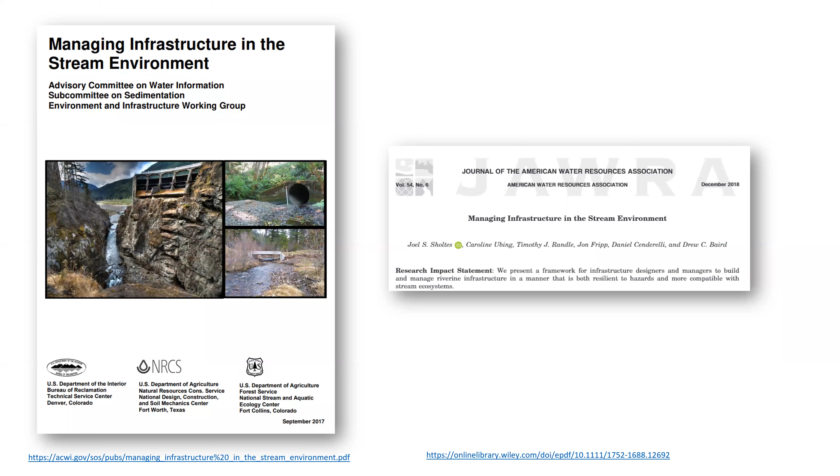So this report was also then published as a companion paper in the JAWRA Journal, which is shown on the right. We were fortunate enough to work with a really great team on these publications. And so you can see here we have a list of 6 different authors from 4 different entities. Furthermore, we have an extensive peer review list that comes from several different entities ranging from state governments, consulting firms, federal governments, and university. So a lot of experience and expertise was brought into this document.

And this all stems from the U.S. Secretary of the Interior's Advisory Committee on Water Information, who is the publisher of the document, and from the Subcommittee on Sedimentation. So we had an individual work group on environment and the infrastructure.

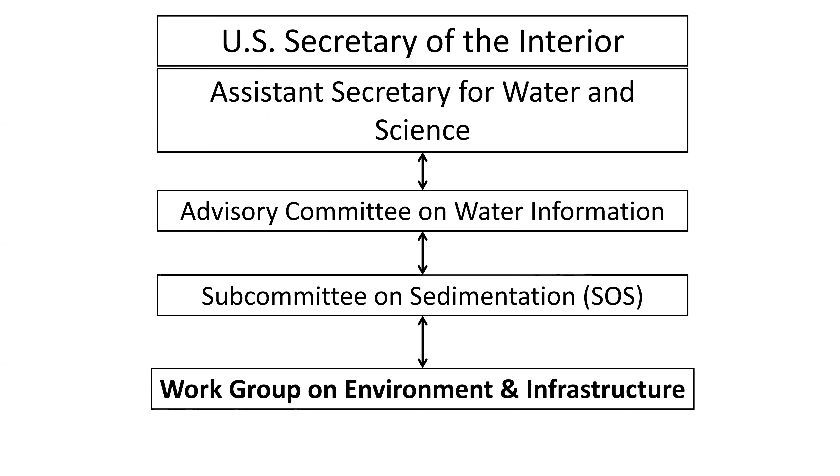So the purpose of these papers is to introduce managers and planners to best practices associated with building, maintaining, and repairing infrastructure. So as new infrastructure is built and old infrastructure is replaced or repaired, we have this excellent opportunity to increase both the infrastructure resiliency and also to decrease the impact to the riparian ecosystems. And so we intend to educate managers going through 5 different steps.

So first we want to introduce them to large-scale fundamental principles of river processes and ecosystem functioning. We then want to provide them with a decision tool or a framework on how to replace, repair, and build new infrastructure in a way that takes the stream environment into consideration. We then apply that framework to examine challenges and solutions associated with 11 different infrastructure types. Now these 11 types are discussed more thoroughly in the paper, but we will only touch upon them for the purpose of this presentation.

We want to discuss how we can best manage riverine infrastructure under uncertainty, both hydrologic uncertainty and condition uncertainty, and then discuss disaster recovery and response. So we spend a lot and invest a lot in repairing and building new infrastructure. So we want to ensure that these expenditures are made wisely and in a way that is best for both the infrastructure and our ecological system.

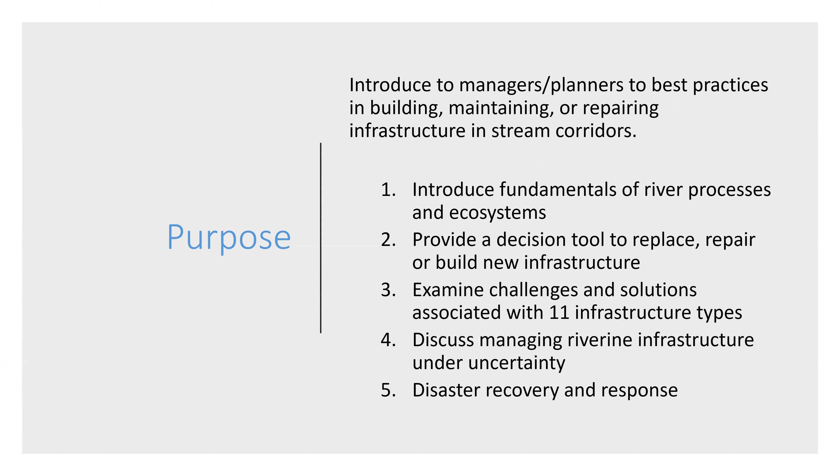So let's get started. We'll first discuss the fundamentals of river processes and ecosystems. As many of you are very familiar with this, we will go through this rather quickly. So first I want to introduce to managers the idea of a stream corridor. The stream is more than just the wetted channel. It is made up of several components, including the channel, the floodplain, riparian zone, and the uplands.

And we want to introduce managers to the concept that these systems all interact on both a temporal scale and a spatial scale, and they interact both longitudinally along the river moving downstream and laterally across the river width.

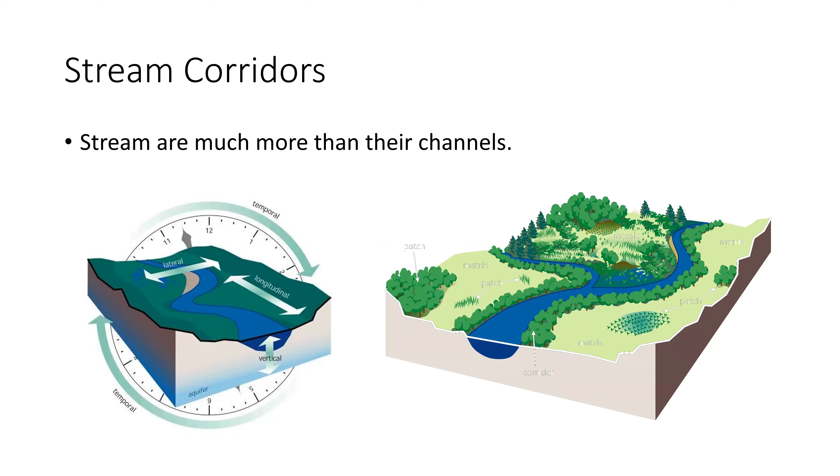To do this, we introduce the concept of dynamic equilibrium and channel response. So we really want to stress to our management community that streams are not static features. The banks will move and it will degrade and aggrade. And so we want to stress that these active systems are capable of transporting, storing, and remobilizing sediment, wood, and

nutrients. So for example, if vegetation is stripped from riverbanks, it is likely that that river is going to widen. The converse is true. It'll deepen where vegetation is very dense. We also expect to see meander bends migrating downstream and across the valley bottom.

So while we recognize that these streams over long periods of time will be relatively stationary in terms that they have average widths and average meander bend lengths, on the short time scale, which is typical of most infrastructure projects, we should expect to see some movement.

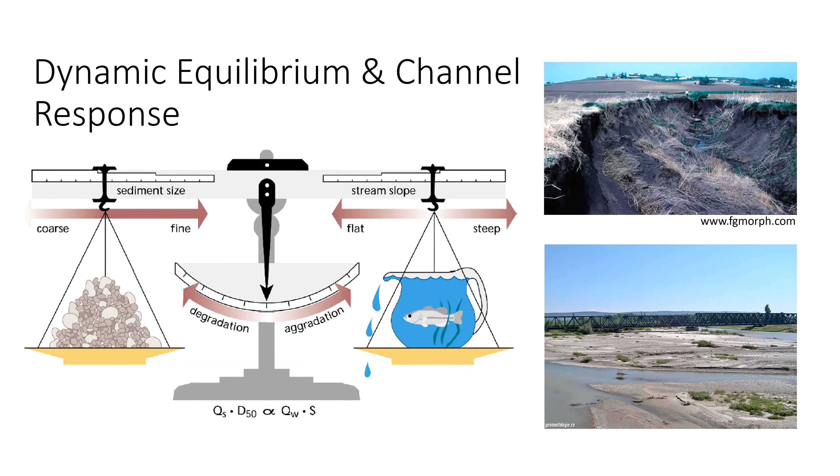So we really want to stress this concept by introducing managers to Lane's balance, which I'm sure you are all very familiar with, focusing on the fact that stream form in alluvial channels results from the interaction of channel shaping factors, such as flow and channel slope, with resisting factors, such as bed material size and incoming sediment load. So if we see a large change in any of those four factors, we're likely to see a response from the channel in either aggradation or degradation.

We want to give managers a little bit more of an idea of how these streams will change using the channel evolution model. And so this model describes how streams will attempt to reach an equilibrium as a response to a disturbance. We also want managers to be aware of what those disturbances could be. So this includes changes to magnitude and frequency of floods due to urbanization. It can also include physical changes to the channel, such as channelization and confinement by floodplain encroachment.

We also want the scientific community and managers to be aware that there is now an updated version of this channel evolution model with a stage 0, depicting an anastomosing wet woodland or grassed wetland that was introduced by Brian Cluer and Colin Thorne and published in 2014.

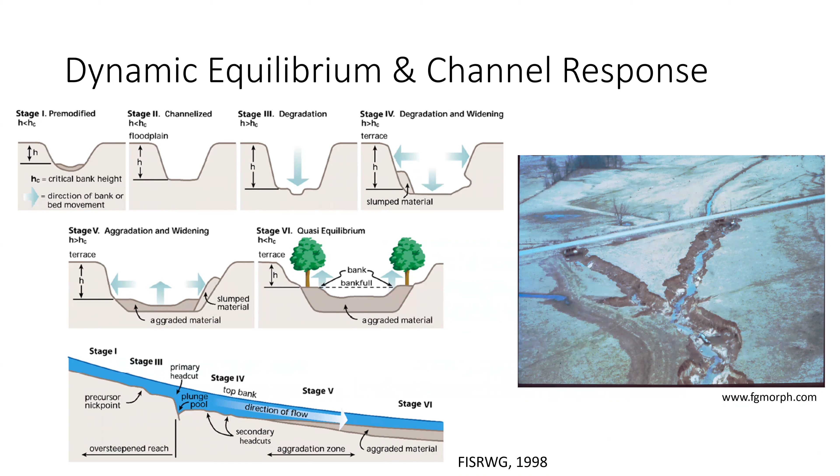So with that, we then introduce the idea of a channel planform to managers. We want them to understand how different channel planforms are likely to move and behave in different ways. So if they have a good understanding of the fact that a braided anastomosing system is going to be very dynamic and it's going to move a lot, they might know that this is not a great place to put a bridge. You're more likely to have success and to have a stable channel in a straight singular channel.

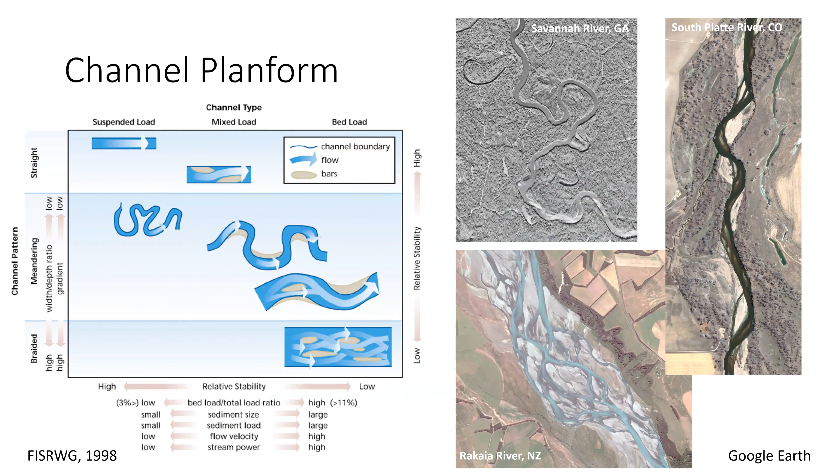Great. And, you know, a lot of the paradigm that we've been taught over the years is that channels are typically single threaded and that they have this orderly transition from headwaters to main stem to maybe coastal regions. And this has informed over the last decades, maybe in the 20th century, our concept of what a reference condition is for a stream. However, in the last decade or so, there's been a lot more discussion.

Caroline mentions the Cluer and Thorne paper, where we're trying to update our concept of channel evolution to account for the fact that channels might have been much different, and we have a lot of evidence that they were different in many situations than we think of them today, and then as we see them today.

Pre-settlement, pre-European settlement, rivers were much more messy. They had more large wood in them, more riparian vegetation. Beaver dominated North America in almost all river courses and had a really intense presence in terms of creating situations for wetlands or multi-threaded wetland type of conditions.

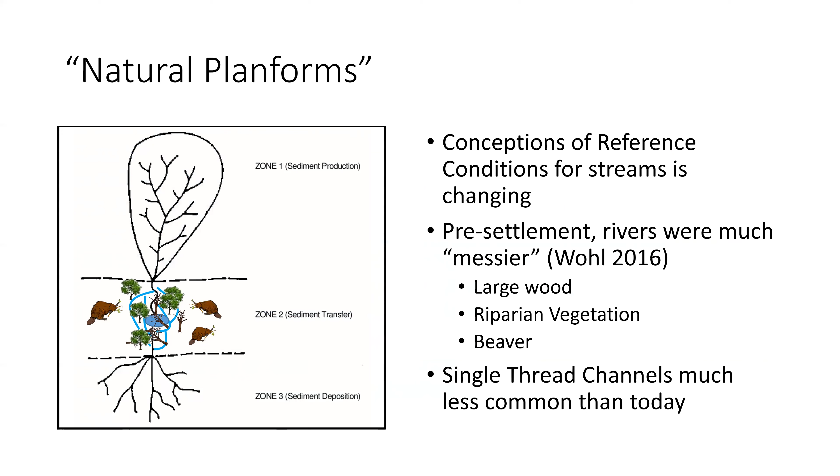Another part, a really important part of understanding river processes is understanding what the natural flow regime is for a particular river. Natural flow regimes, or any flow regime that supports a functioning river ecosystem, has many components, including the magnitude, frequency, and duration of floods, of high discharges and low discharges, the timing of those flood peaks.

In the Rocky Mountains, we have a very strong snowmelt signal, and that's very common in big mountain systems. In other areas, floods might be scattered throughout the year as a result of precipitation, as well as the rate of change of floods, how quickly they rise and fall. All of those can be influenced by flow regulation, by urbanization, changes in hydrology to the system, wildfire, for example.

Some of these might be long-term changes or transient changes. And so understanding the context of the flow regime and how that influences the physical environment and biological environment is important. On the right side of the screen, there's an example of altered hydrographs. So discharge on the y-axis and days or months of the year on the x-axis.

And it shows that for the Green River, we have a fully regulated system, which would be the red line compared to the blue line, pre-dam and post-dam. On the Yampa, it's largely unregulated. And then downstream of the confluence of the Yampa and Upper Green, we have a kind of a mixed flow regime that's impacted by the regulation on the Upper Green River, but supplemented by flows from the Yampa.

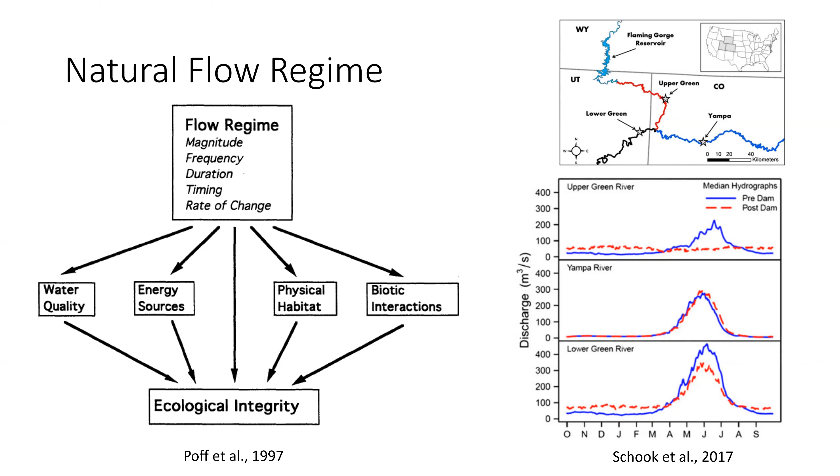Another part of understanding river processes is understanding the hazards that they pose to infrastructure and to development within the river corridor. This is just an example of a stream crossing that, while it's an open culvert, which is great, we might have a natural bottom there. The channel decided to go around this stream crossing and erode the road and take it out.

So perhaps this was sited in an area where flow was constricted in an unnatural way and resulted in the ability for the river to move around this structure as a result of a flood. So characterizing hazards as part of understanding the processes in rivers is going to be important to understand how to manage them and construct them.

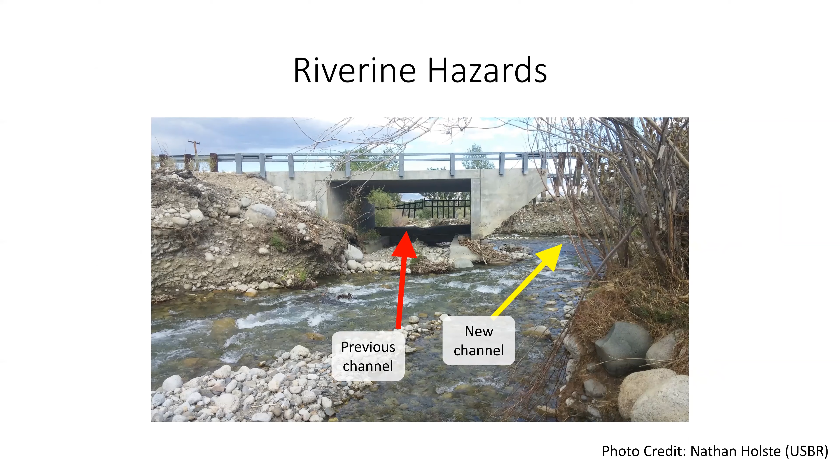So we have existing tools which typically focus on inundation hazards. So this might be the 100-year, 1% annual exceedance flood map, floodplain map that is part of the National Flood Insurance Program and FEMA. That is one example of flood hazards. Another is fluvial geomorphic hazards. And these could be delineated by understanding geomorphic processes. They typically aren't mapped as a rule of thumb.

However, certain states have taken on the initiative to create methods for mapping what we might call the fluvial hazard zone. And this would be a zone where the river could move as a response to the flood. And we have an example of this on the St. Vrain River in Colorado, where the river took a new course across the valley and an avulsion occurred. And the river moved outside of the previously mapped inundation floodplain from FEMA.

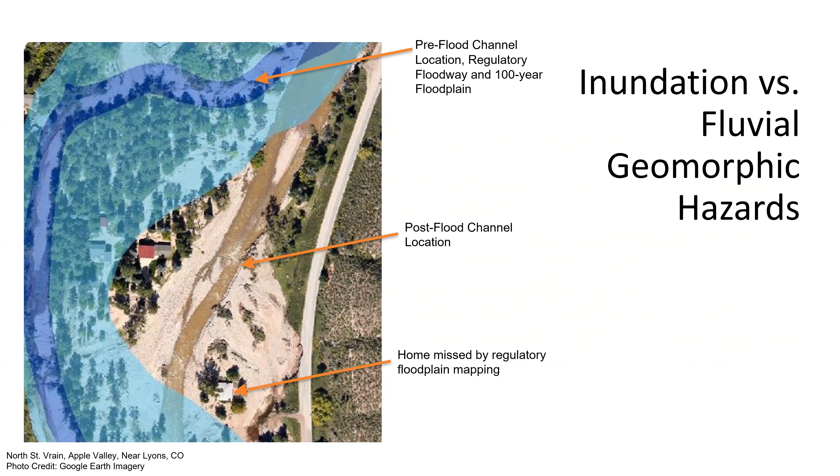And so this was a hazard that hadn't been mapped or considered based on existing floodplain maps. And so considering the fluvial hazard zone is important, as well as the inundation hazard zone, to characterize fully the hazards within a river corridor.

And this is what that might look like, where we have in green the active river corridor delineated as the geomorphic floodplain that the river might occupy during a flood or gradually over time as meanders move across the floodplain. And then appended to that would be an erosion hazard buffer, where erosion could occur into upland areas such as terraces or hill slopes that might be high above an inundation floodplain. Nevertheless, they might be susceptible to fluvial hazards in response to a flood.

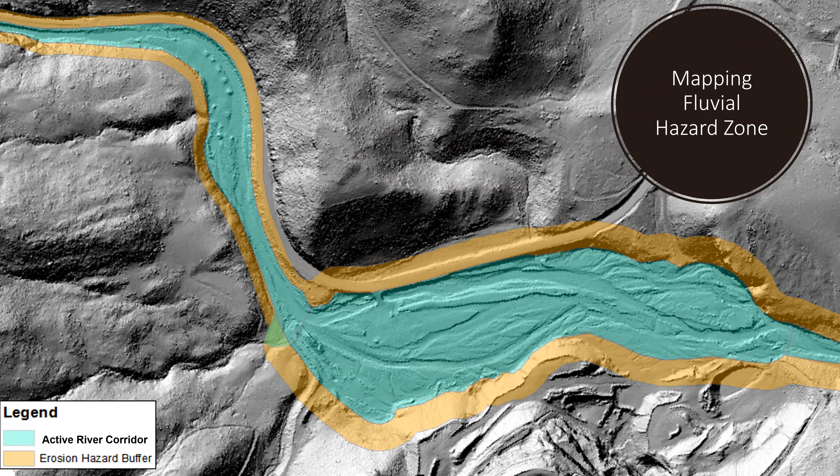So now that we've discussed the hazards to the infrastructure with our readers, we then want to introduce concepts associated with riverine ecosystems. How do they function? What makes them healthy? What is a degraded system? So we do this by discussing habitat heterogeneity and how it's coupled with biodiversity.

So we want to stress to our readers that having all of these little pockets of habitat that are all interconnected and slightly different can add to the biodiversity and encourage different species and a variety of different organisms to be living in the area, which contributes to the health of that system.

So we also want to stress physical complexity, that idea that Ellen Wohl has introduced of messy streams. We've had in our head for such a long time as a society that a healthy river is a clean, single channel without debris in the channel. Well, current research is showing that this isn't necessarily the case. We want to see wood in the channel. We want to see big boulders. We want to see vegetation hanging into the channel.

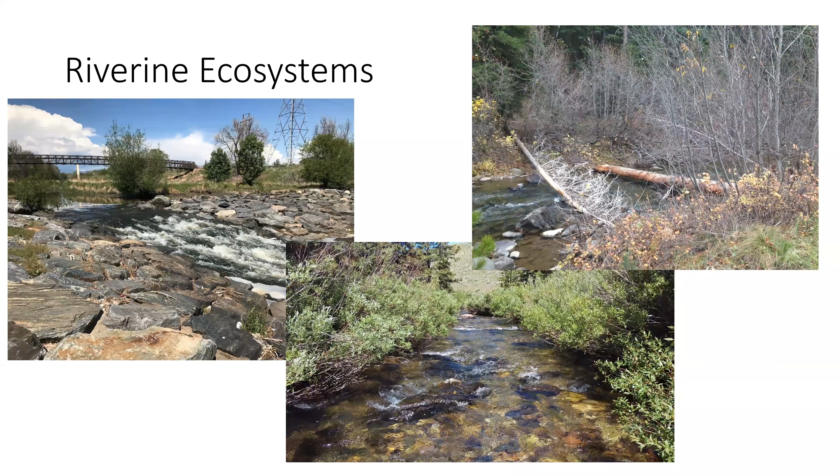And so introducing and stressing those concepts of lateral and longitudinal connectivity and continuity of water, sediment, and nutrients. All of the nutrients in the floodplain then come into the river to feed the macroinvertebrates, to then feed the fish. Also, the continuity of sediment and nutrients downstream. The sediment is held in the reservoir. It's not going to move downstream. We're going to see scour downstream of that reservoir, which will then move all of those particles that are beneficial to fish species.

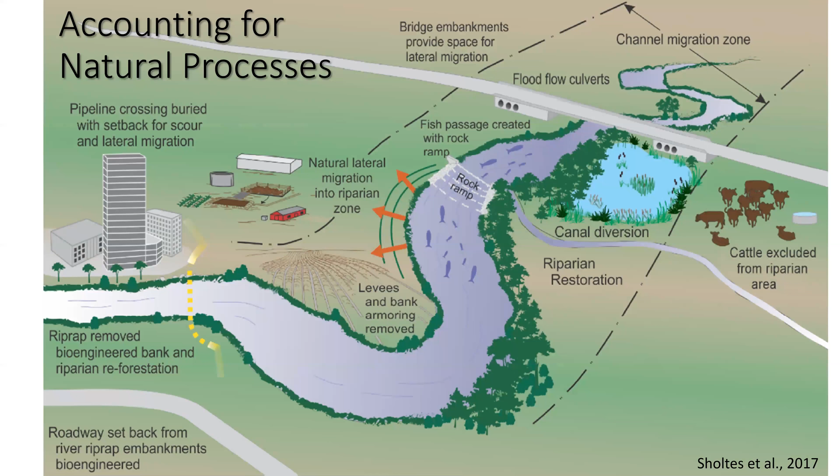We can see that our road has been moved away from the channel. Our levees have been moved back and possibly removed where appropriate. We also see that we have a wetland that has been restored, so if the river were to move, it's okay. We see that our riprap has been removed using bioengineered bank stabilization instead, which offers more habitat opportunity. And then looking at our bridge, we have a much wider span, allowing the river to move underneath the bridge, and then we have some overflow culverts in case we see an uncharacteristically high storm. So this is the more resilient and stream compatible infrastructure that we want to encourage managers to consider when replacing or repairing their old infrastructure.

So let's look at this decision tool in a little bit more detail. So we have 4 steps to our decision tool that we're encouraging managers to use when looking at infrastructure projects. I will now take you through each of those steps in more detail. So step 1, we want to identify project goals and scope as we would in any project. So it's very important at this point in time that we consider the social, economic, and ecological values associated with each community.

So for example, a bridge project in Western Colorado will have a very different focus than the same bridge project that could be located in a rural community in Indiana. We want to encourage managers to have stakeholder engagement very early in the project. This will allow for a more successful project and will also allow you to consider more components.

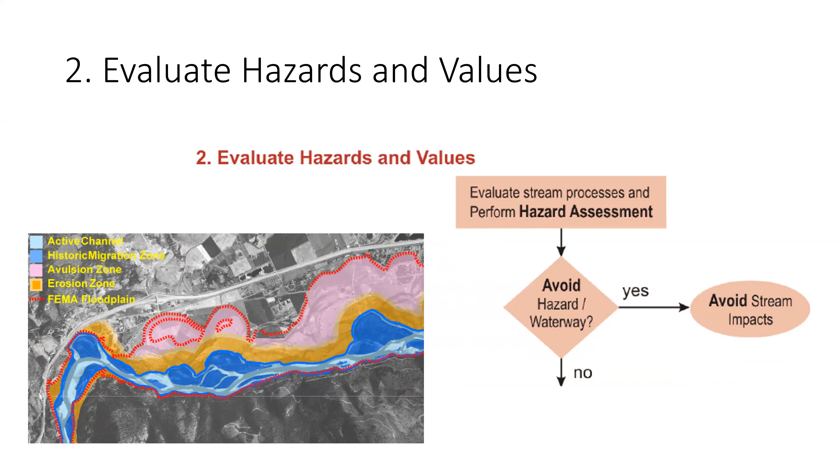It is very project dependent, but some options are flood inundation mapping, geomorphic hazard mapping, and mapping out that channel migration zone. We also recommend having the right team involved for each infrastructure project. Make sure there's a fluvial geomorphologist on board should the project need one. And then in this situation, we want to stress avoiding those stream impacts is going to have the most resilient project. However, we recognize that that is not always a feasible alternative.

So your third step is formulating those alternatives of the projects that are interacting with that stream environment. So again, where possible, we want to design a solution that avoids all interaction, will limit the exposure to the riverine hazard and avoid impacts to the environment. However, if these impacts cannot be avoided, we want to first minimize those impacts. So for example, reduce the project's footprint in the channel migration zone, lengthen the bridge span, etc.

We also recognize that very different considerations are needed for existing versus replacing infrastructure. So in the opportunity that aged infrastructure is damaged, we can replace it or relocate it. So one option would be if a flood comes through and washes out that old barn, maybe it's not worth rebuilding that barn, or we can rebuild that barn in a different location that is outside of the hazard zone.

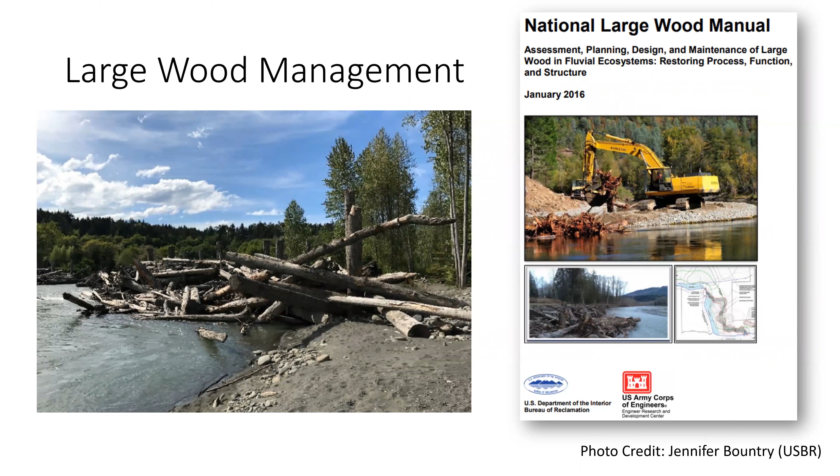So there are resources that we touch on in the guidance document that others have worked on to provide managers with tools to think about how to manage wood, how to perform risk assessments if we're in a sensitive area where wood plays a really critical role to maintain certain species habitat. How can we manage that wood in a way that reduces risk to certain structures and also allows for the benefits of large wood in river systems?

Stream bank protection, another example of riverine infrastructure. The traditional sense of stream bank protection would be large stones, riprap, different engineering devices that would reduce bank erosion. Where it's feasible, where it makes sense, there are a lot of other options, and so we highlight these. There's a lot of great guidance documents out there on how to conduct bioengineering, use of live material that has the potential to be more dynamic, meaning flexible, and grow back and regenerative as well. So riprap, you don't just set it and forget it. The rivers are always moving these rocks around.

So this section in this guidance document draws managers' attention to different options for protecting stream banks where stream bank erosion is a concern, to protect infrastructure, and in a way that not only results in the engineering goals of reducing bank erosion where that's needed, but these also have the potential to provide the ecological benefits that vegetated riparian corridors have in natural systems.

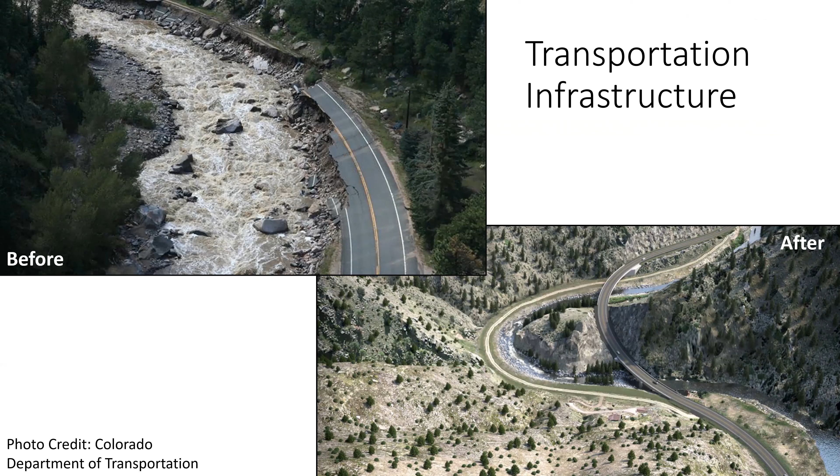Stream crossing infrastructure is very vulnerable to flood hazards and can also create impacts to stream ecosystems. Here's an example of a perched culvert on the left-hand side, and this will allow flood flows to go through it, but it's not allowing small fish and really probably any fish to pass through that culvert. So it serves as a barrier. And there's a lot of examples of this across the country.

It's getting more attention now that habitat connectivity for certain species is getting more attention, especially in New England and salmonid areas where we have endangered species, as well as in other areas where we care about the fisheries and put effort into that.

So there's a lot of great documentation and guidance on how to design stream crossings in a way that maintains continuity of sediment, of flow, allows for passage, and also can result in a stream crossing that is more resilient to floods, allowing flood flows to pass through it as opposed to becoming a bottleneck to flow and sediment. So the U.S. Forest Service has a stream simulation guidance document that came out about 10 years ago. The Federal Highway Administration also has documentation and guidance documents on these kinds of crossings.

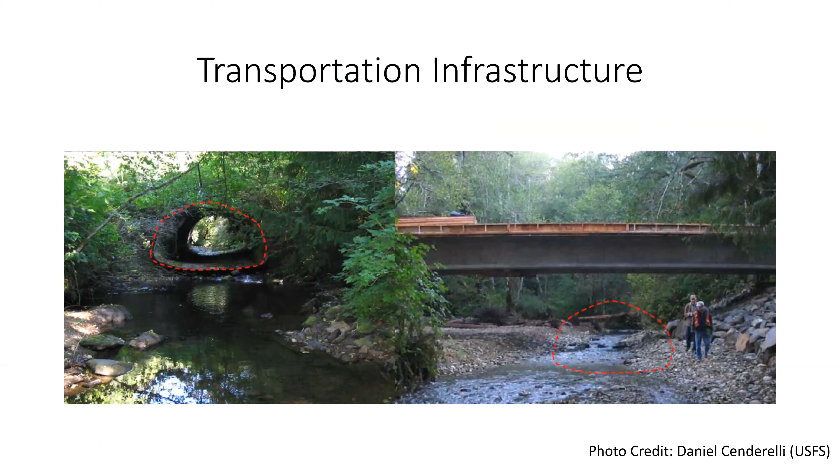And so looking for opportunities, you can't do this everywhere. Obviously, we're not going to take whole neighborhoods out where they've been established in the floodplain, but acknowledging that floodplain encroachment does put more infrastructure at risk and also has ecological impacts, and looking for opportunities within river corridors to either remove or set levees back, or to take encroachment out of the way and restore floodplains. This is ecologically important. So we talked about lateral connectivity, and this allows waters to be laterally connected to the floodplain. It can reduce flood peaks downstream, and also provides that hydrologic and ecological connection with the river and its floodplain.

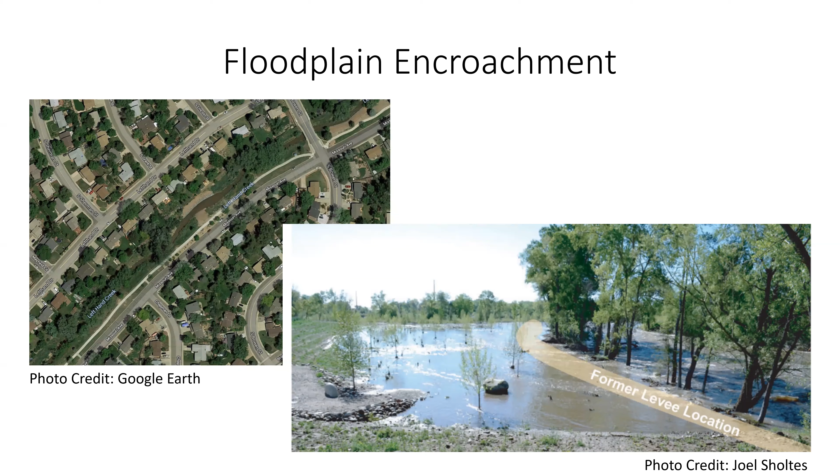So looking at all of our infrastructure, a lot of times these designs rely on estimates that are subject to a lot of uncertainty. We looked at the stream flow. We want to predict what that 100-year event, that 10-year event looks like so we can design accordingly. Unfortunately, there is a lot of uncertainty associated with these data. There's many reasons. First of all, we have very short data records. A lot of times we're lucky enough to have 20, 50 years of record, whereas really we would like to see a lot more. There's a lot of land use changes associated with those data records. So if we see a huge spike in our stream flow, we don't know what could be happening. Maybe there's some climatic variability. Maybe there's a land use change. We also have a lot of hydrologic variability.

So the traditional route is to just apply a large safety factor to our project and then hope that it works. This is particularly evident in riprap designs. However, this is not always the most ecologically compatible result and may not serve the project in our best interest. So we want to offer some other tools on how to manage under uncertainty. For one, incorporating tolerances for change into our design. So instead of applying that factor of safety to the design, maybe we apply that factor of safety to the hydrologic flow. Maybe when building that bridge, we design those overflow culverts so that the design can work with a larger variety of different flow events.

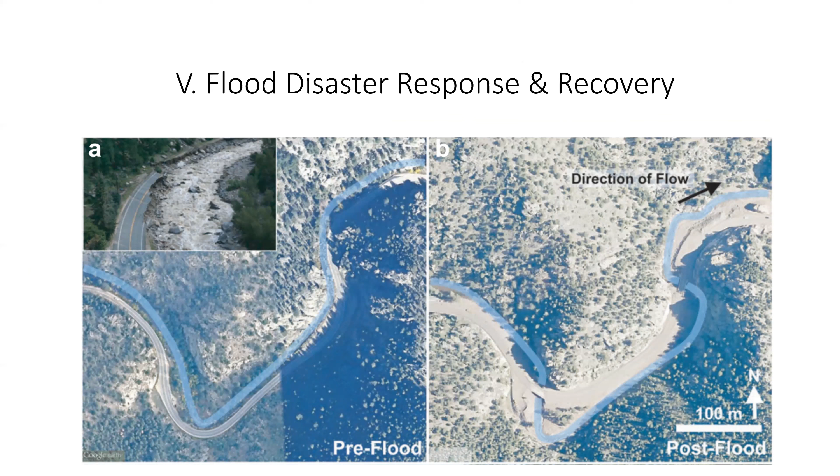And so we want to stress to our readers that there is a lack of literature and regulations on, quote unquote, building back better, and this provides an excellent opportunity for future research and future actions. So that is our call to action at the end of our presentation, something to think about as we're discussing infrastructure with managers and as we're working on our designs.

So with that being said, all of you know we invest a lot to repair and build our new infrastructure. We want to make sure that these expenditures are made wisely to protect our infrastructure and the river environment. So to do this, we have prepared 2 guidance documents geared towards managers and planners. We want to teach them how to better build, maintain, and repair infrastructure that is resilient to riverine hazards.

So this is beneficial to the communities because less expenditures are necessary for maintenance, and it is also better for the riverine ecosystem and environment, which then benefits the community. The health benefits associated with green space have been very well documented and are quite amazing. So this will benefit the community from that aspect as well.

So in order to better communicate these concepts to managers and planners, we introduced fundamentals of river processes and ecosystems. We developed and introduced a decision tool made to replace and repair and build new infrastructure from the stream perspective. And then we introduce our readers to challenges and solutions associated with 11 different infrastructure types. We want to manage our riverine infrastructure under uncertainty, and we provide some tools on how to better do that. And finally, we want to consider our disaster recovery and response and see if there's a better way that we can respond in these situations.

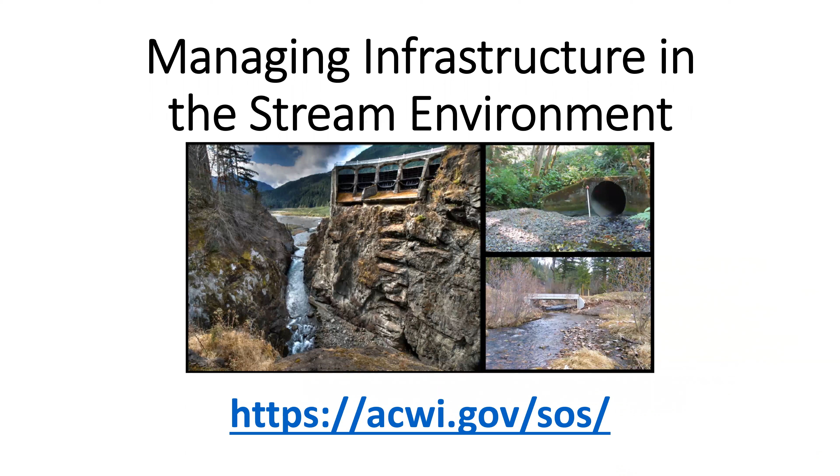We do discuss in the guidance document, as Caroline mentioned, that is one of the examples we provide as a good alternative to a weir in a situation where flow withdrawal is needed. Infiltration galleries up to a certain flow rate can be potential opportunities to reduce impacts in the stream itself and also meet the flow withdrawal needs of the situation.